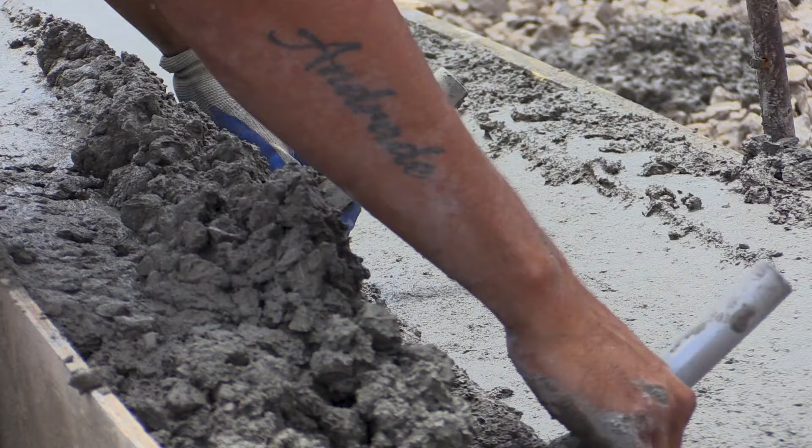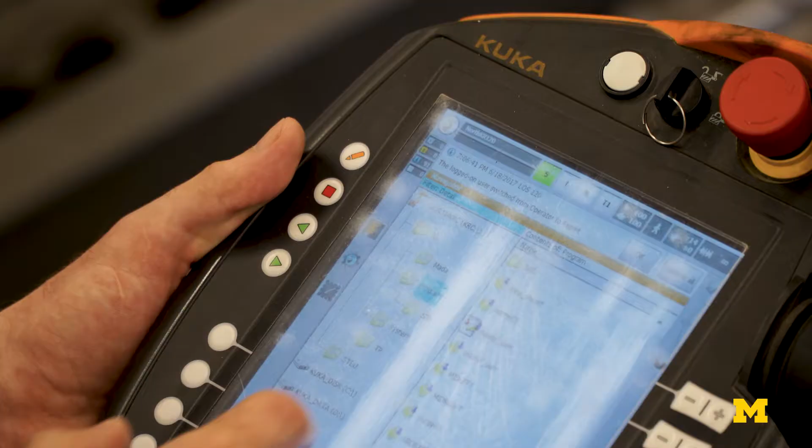Construction is a kind of messy science. Materials bend, sizes can be off, and what looked good on paper can end up installed incorrectly on the worksite. Robots aren't equipped to deal with these changing elements in real time, so they've never made an impact on the construction industry. Until now.

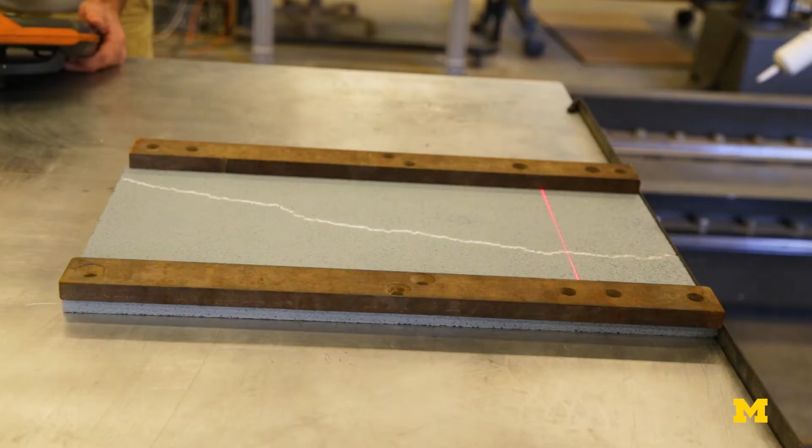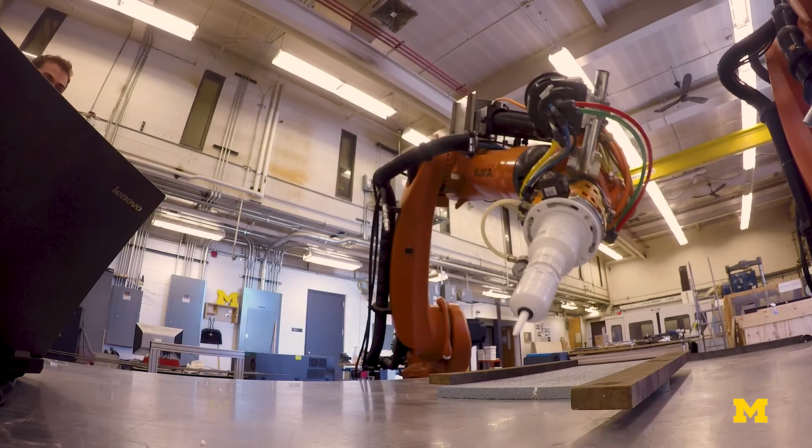U of M researchers have developed modeling techniques that will help on-site construction robots with autonomous decision-making. The robot can adjust to all the differences using real-time sensing data and compares that to the construction project's original model. The robot can update its plan of action all without additional programming.

I actually worked in the construction industry for 10 years before coming back to school for engineering. It took its toll on my body. It's a very rough line of work.

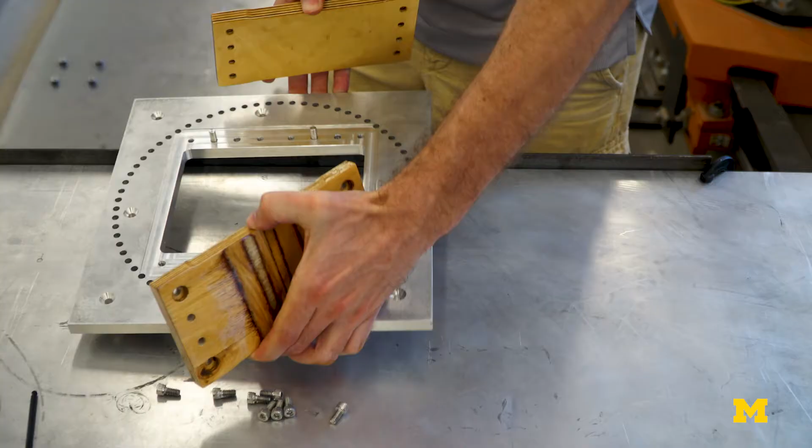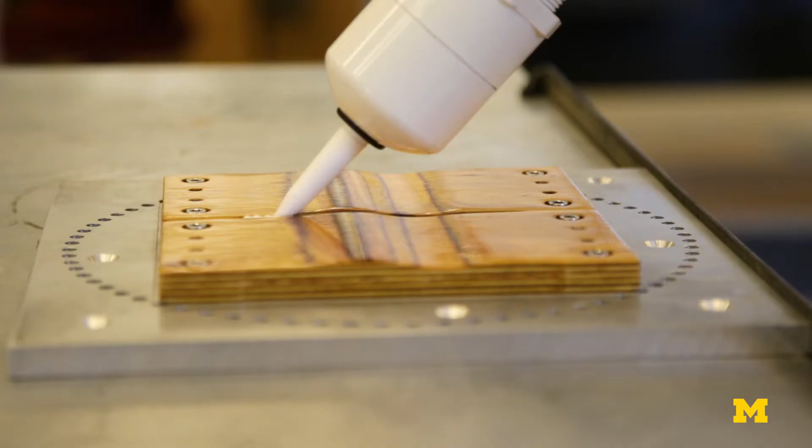What we're trying to do here is demonstrate that robots can perform construction activities and adapt their plan in order to perform work. We're using caulking as our example, but it could represent many different construction activities - caulking, welding, cavity filling like spray insulation, soldering pipe, so on and so forth.

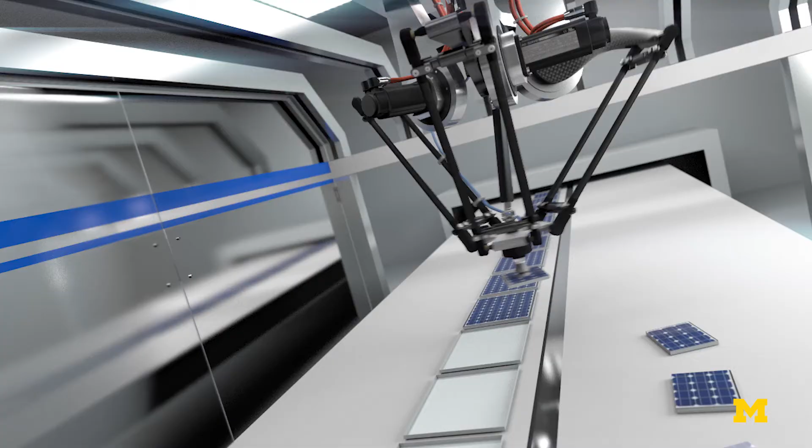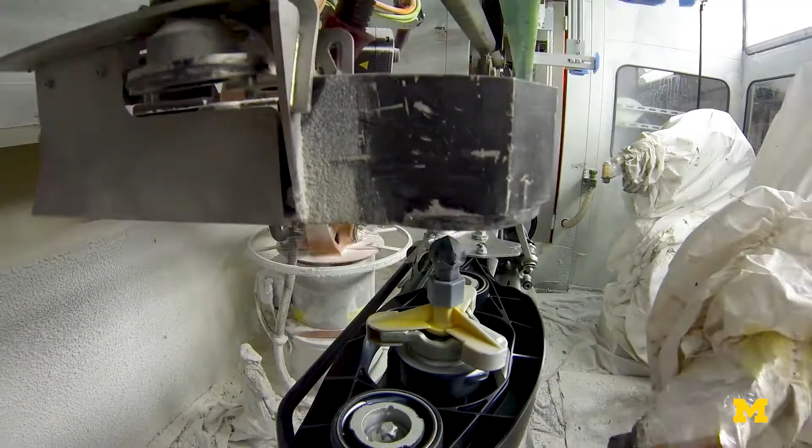Robots are good at doing repetitive tasks and doing the same repetitive task to the same specification. In a factory, typically the parts, the way they come together, the tolerances are within millimeters of each other. All the parts fit together with a tight accuracy.

In construction, robotics is a little bit more challenging because unlike a factory floor, on a construction site, you often find it is not uncommon for a large fixture, even such as a staircase or this railing, to be off by a few inches when the work is actually being done.

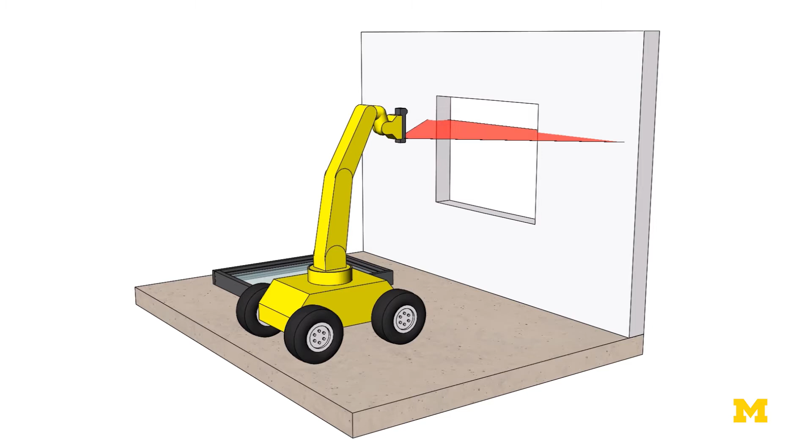One example might be a robot trying to install a window panel into a rough opening. It needs to actually sense the work, because if it tried to perform the work blindly, it would fail terribly.

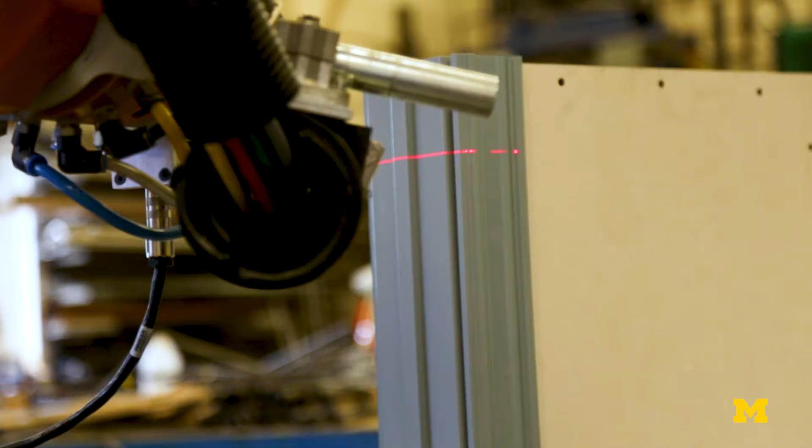We have made some significant progress in this direction, particularly in the area of joint filling, where a robot is expected to discharge a fluid material into joints or gaps of various shapes and sizes. Maybe it goes from a half-inch wide down to nothing, and maybe the work pieces are staggered in height relative to one another.

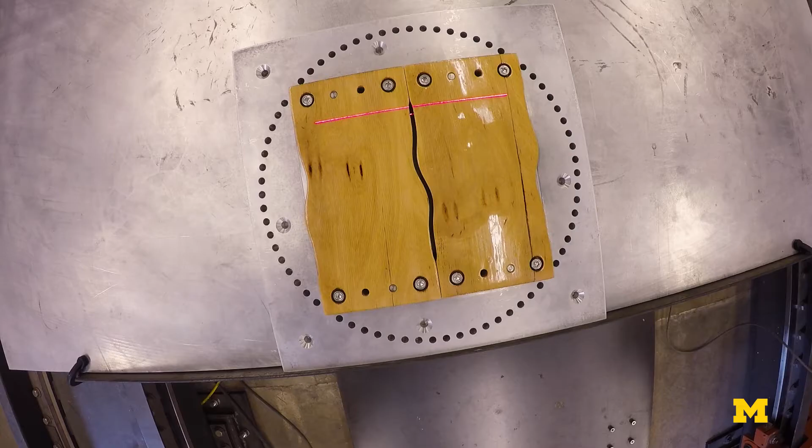As long as that object ends up somewhere within the robot's sensor window, using the model fitting technique that I've developed, it will match models of the work pieces it's looking for to the actual data it has obtained. Knowing that, it can then adapt its plan and perform work on the object.

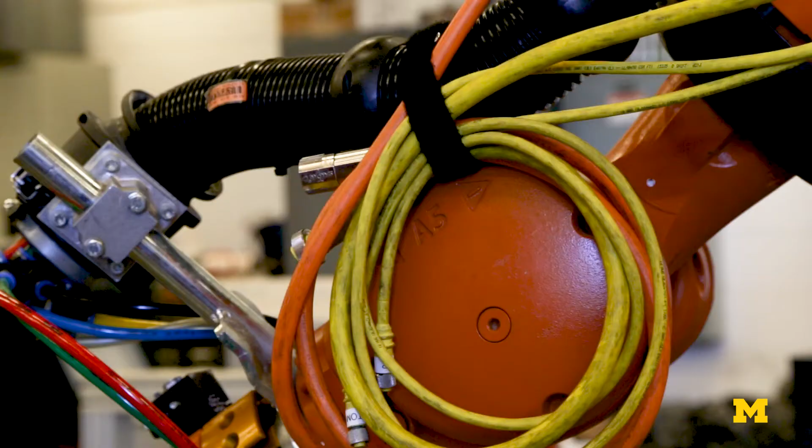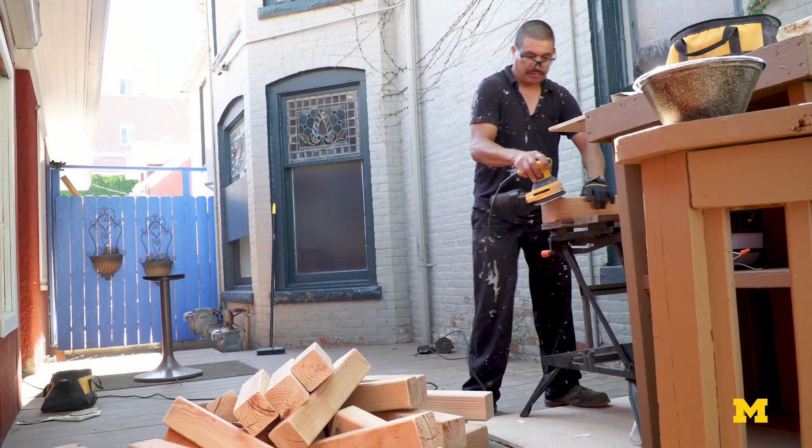Construction is at the very top in terms of workplace injuries and workplace fatalities. So it is very conceivable that in the near future, every construction worker or craftsperson has a robot assistant or a robot apprentice working for him or her, doing all the heavy lifting, the climbing, reaching out in dangerous places, while letting the human worker or the human responder do the intellectual thinking and problem solving.

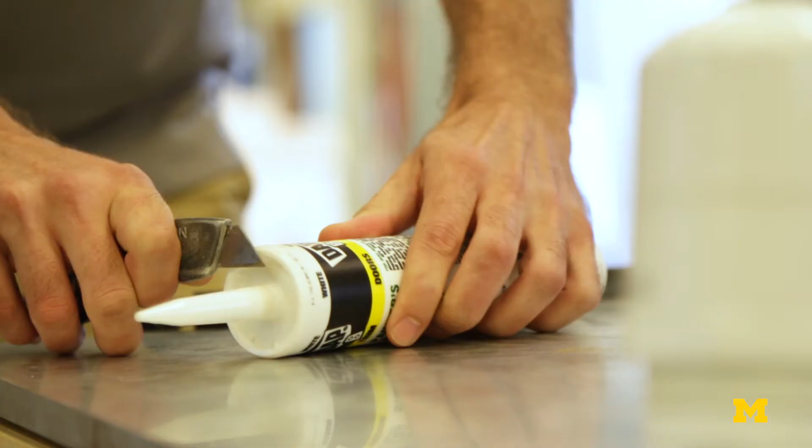I still have friends and family in the construction industry, and I'm sensitive to their concerns about robots taking their job. If there's work that people don't really want to do or is hazardous, I think they will openly welcome assistance from robots to perform that work.